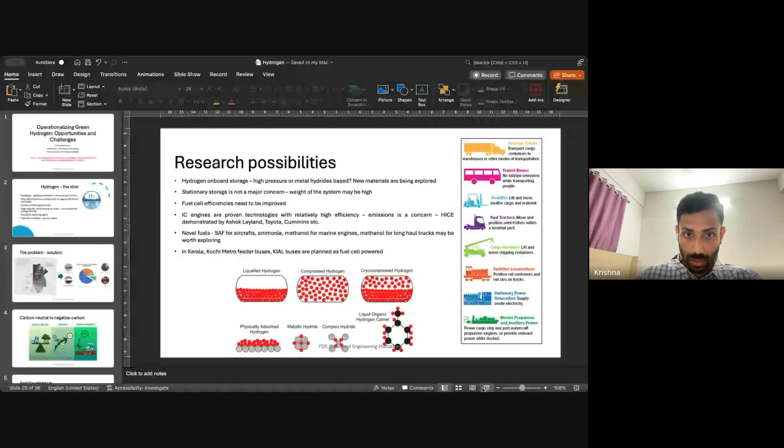Sir? Yeah, good evening. Can you see me? Yes, sir. I hope you can hear me well as well. Let me also share my screen. Just give me a minute. Can you confirm if you can see my slides? Yes, sir. It's visible.

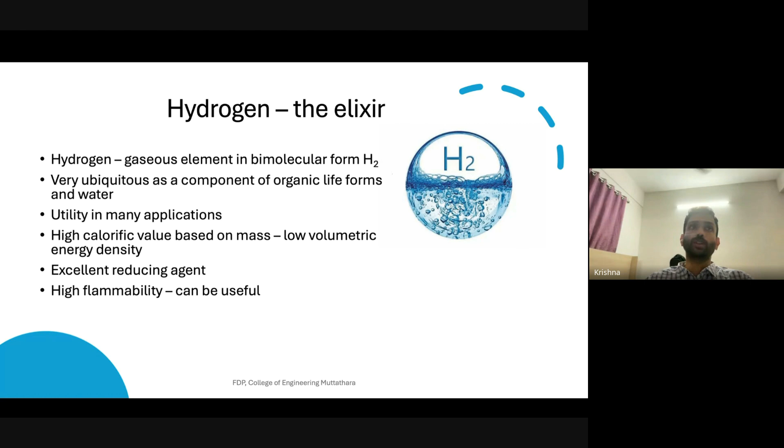But on the other hand, the flammability of hydrogen is also advantageous, because you can use it very easily as a fuel in practical devices. You do not have to worry too much about designing your combustion device. It has a very wide flammability regime, even with very little oxidizer, most commonly air. With a very small percentage of air, you can have hydrogen combusting, which is advantageous, but also disadvantageous when you look at the explosive nature of hydrogen.

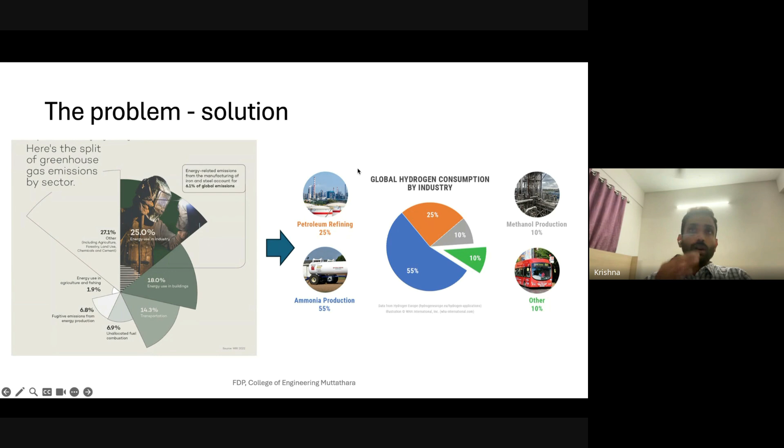So if you look at the global hydrogen consumption by industry at present, we'll see that much of it is used in petroleum refining for various processes, which is like a value addition for the petroleum industry. Then you can use it for methanol production, which contributes to 10%. You have ammonia production, which is a major contributor. Ammonia is a fertilizer, and it is also a precursor for urea production and so on.

So as you can see, majority of the hydrogen that is being produced, irrespective of what the source may be, is used in ammonia production. And then you have certain other uses like petroleum refining, which is major. And then among some 10%, transportation is also one of the uses.

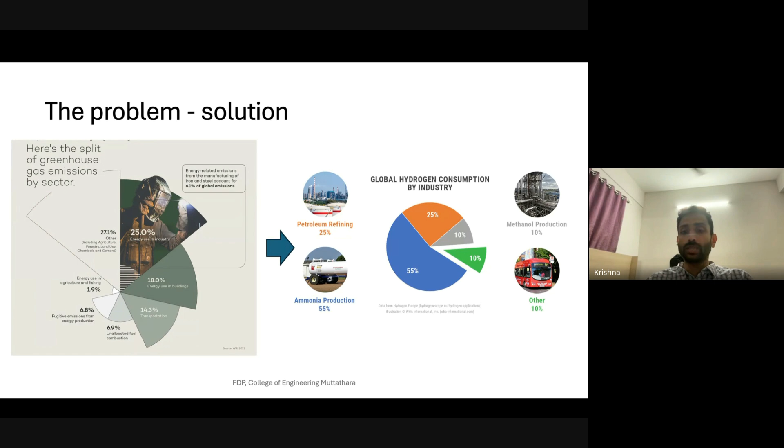Now, if you look at this total 100%, that is still not even 1 to 2% of the energy needs that are satisfied through hydrogen across the globe. Which means there is still a significant proportion of solar energy, wind energy, but hydrogen as a fuel or as a solution for energy production is not a viable option yet. So why are we looking at this?

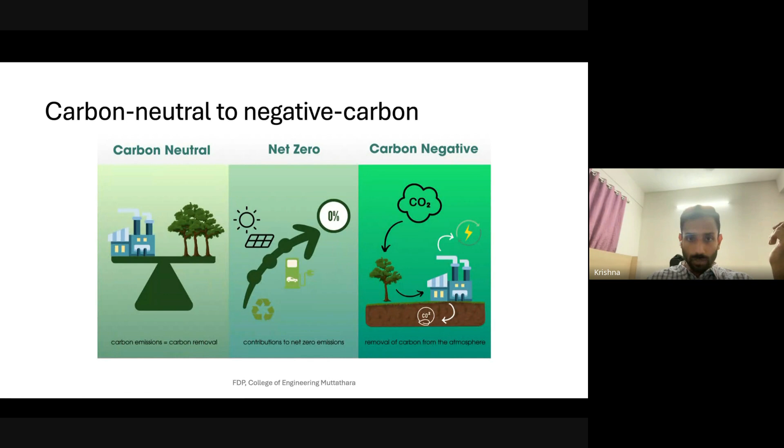Carbon negative is where you remove more carbon from the atmosphere than what you emit through your industries or through power production technologies. We want to move towards net zero initially and then to carbon negative so that global warming can be reduced. So for that, hydrogen is the way to go in a major way.

And as you can see, even wind energy is sort of rooting for hydrogen in this fight between hydrogen and carbon dioxide. So carbon-based or fossil-based fuels are a major problem because they contribute to greenhouse gas emissions, and hydrogen or hydrogen carriers do not contain carbon, and that is a viable option as far as the reduction in greenhouse gas emissions is concerned.

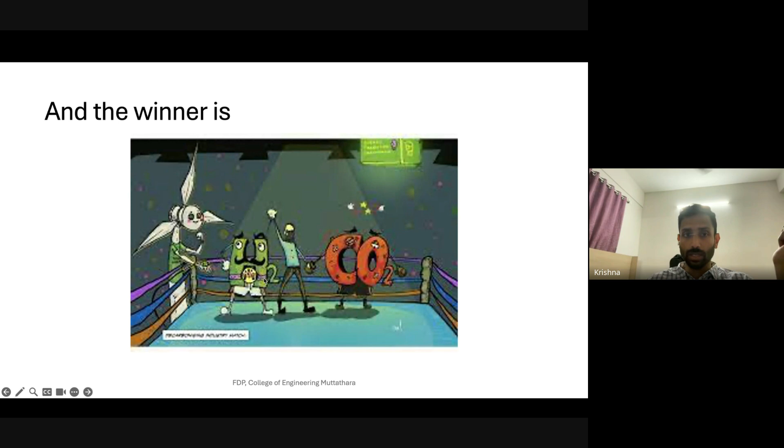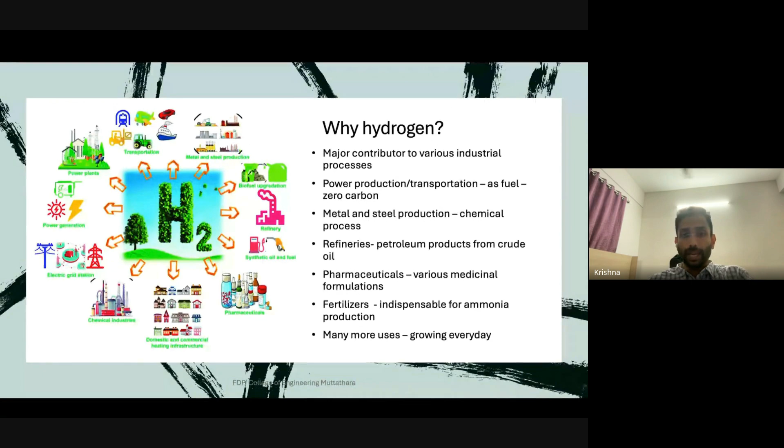Pharmaceuticals is a major application of hydrogen as a source. Various synthetic oils and fuels can be produced from it. Sustainable aviation fuel can be produced from hydrogen, and it already finds a lot of use in refineries. So hydrogen's uses are growing, which means that if you want to replace conventional sources like fossil fuels in any of these applications, you will need to produce hydrogen at a much higher rate.

So if you look at green hydrogen, it essentially means hydrogen which is not polluting, that is hydrogen obtained from the electrolysis of water. This electrolysis obviously requires some energy input. You supply some electric power to split the water molecule into hydrogen and oxygen. During this process, if the electric power input is obtained from renewable sources, then the hydrogen is termed as green hydrogen.

On the other hand, if the energy for electrolysis is not obtained from renewable sources, let's say it is obtained from nuclear sources, then it is called pink hydrogen, and there are other categorizations also.

The most common way of producing hydrogen at present is from natural gas through steam reformation, if that includes some carbon capture and storage. As you know, natural gas is nothing but methane, which contains 1 atom of carbon and 4 atoms of hydrogen. So if you're producing hydrogen from methane using

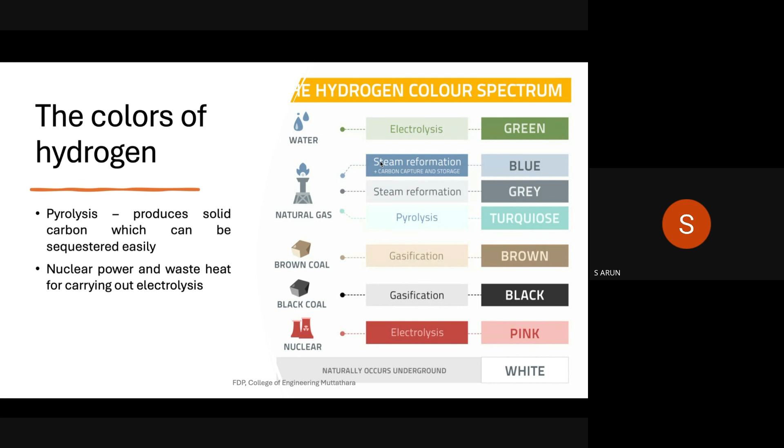Hello? Yeah, was there a question? Sorry. Yes, Suraj sir, can you please mute your mic? Sorry, sir. Yeah, no problem.

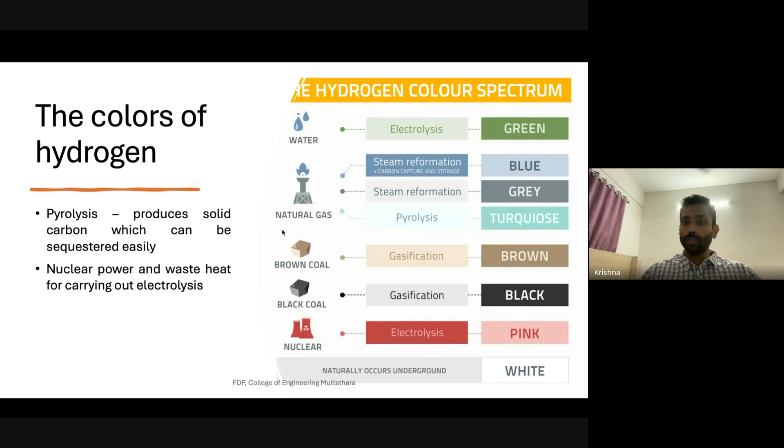So the biomass gasification that produces hydrogen has been termed or categorized as green hydrogen, because biomass, obtained from organic life forms, mainly from agricultural waste and from various trees and plants, can be termed renewable. If more trees are planted, as many as the carbon dioxide released into the atmosphere, then it is in effect a carbon neutral technology, and so it can be considered green.

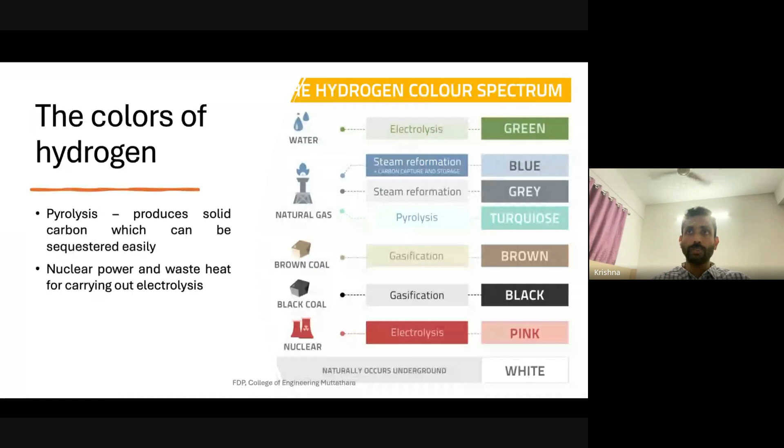That is the National Green Hydrogen Mission policy that has been implemented at the moment. So it is important to look at the Indian perspective also on this. If you are working on, let's say, biomass gasification, you are contributing to the green hydrogen mission in a major manner. So let's look at how hydrogen is produced.

Where does the hydrogen that we use currently in our various technologies come from? The most common technique is steam methane reforming. Where the methane comes from, again, is a question. That methane could be from natural gas fields underground, a major fossil fuel, or it could be from other sources such as biogas, which is produced from biomass, which are agricultural waste, or human and animal waste, and so on.

So as you can see, if you produce hydrogen using various primary energy inputs such as electrical energy, it is called electrolysis.

If you input some thermal energy, there are various thermochemical processes that you can use. Many of these also utilize some catalysts.

There is photonic energy, which is essentially what are called photoelectrolysis. You have PV electrolysis, meaning the photovoltaic cell provides the energy for the electrolysis. And then there is the other one, photoelectrochemical, meaning the energy for the splitting itself is obtained from the light available from the sun, and an additional catalyst catalyzes the reaction.

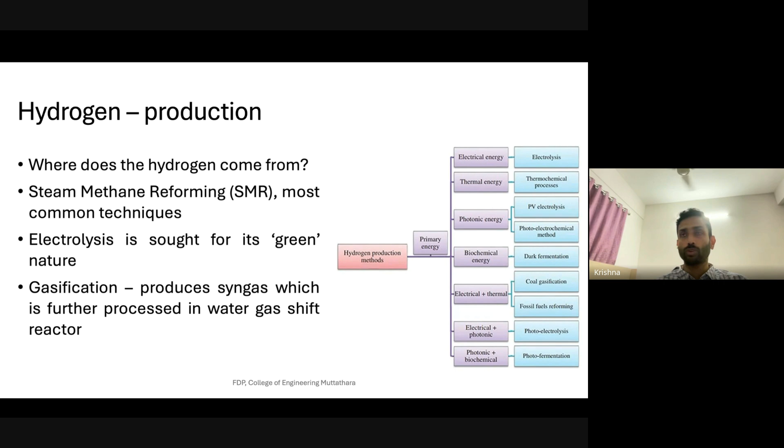And then gasification, this produces syngas, which is further processed in a water gas shift reactor for producing more hydrogen.

So if you look at the cost of production of hydrogen, if you think about the traditional method, steam methane reforming, from natural gas, which is methane, reforming it using steam and catalyst costs close to 0.5 to 1 dollar per kilogram. By today's rates, that would be about 45 to 85 rupees per kilogram.

If you add carbon capture, utilization and sequestration techniques, this will go up in cost, because these technologies also require energy input, meaning you will have to provide more input energy than the amount of hydrogen you are producing. So the cost goes up, to about 1 to 2 dollars per kilogram.

And from electrolysis using renewable energy sources, this is extremely high, right now around 3 to 8 dollars per kilogram. Again, it depends on what the primary energy source is that you utilize.

So some other numbers in perspective: if you want to produce 1 ton of hydrogen, you require 9,000 liters of water for the electrolysis, about 50 megawatt hours for proton exchange membrane electrolyzers and alkaline electrolyzers. And if you want to carry out desalination of water and then use that water for electrolysis, an additional 9 megawatt hours of power is required. So the total requirement would be about 59 megawatt hours of electric power.

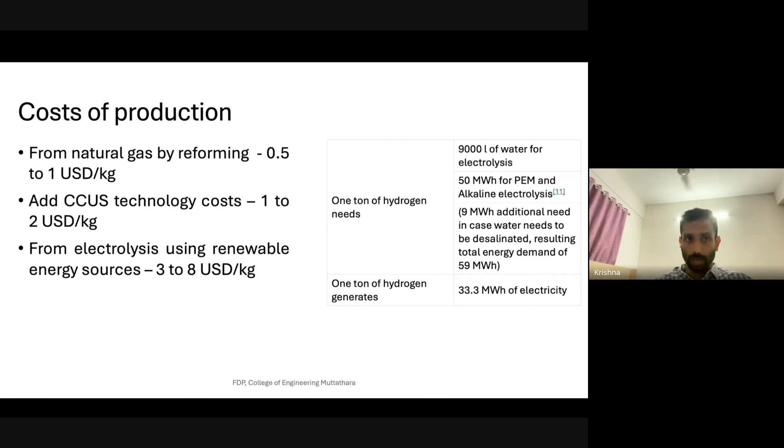That is very important. So if you look at the electrolysis of water, this is a very promising method of hydrogen production. Anyone who says that they are working on green hydrogen is probably exploring electrolysis of water as the solution. It is green if the electric power is from renewable sources. This can be used outside of the grid, meaning that you do not have to depend on the grid for the electric power required to split water.

There are three very common electrolyzers available. One is the proton exchange membrane electrolyzer, where there is a voltage applied across the electrolyzer. There are electrodes, and you have hydrogen ions crossing the polymer membrane. This forms hydrogen at the cathode. The most common catalyst used is some platinum based catalyst - these are usually noble metal based catalysts. The electron obviously flows in the external circuit, which is how you supply the electric current or apply the voltage. This is as far as PEM electrolyzers are concerned.

Then you have solid oxide electrolyzers. They use ceramic solid oxide as the electrolyte, and operate at slightly elevated temperatures of about 700 to 800 degrees Celsius. Here, the oxygen ions cross through the electrolyte and move to the anode to form oxygen, while hydrogen is formed at the cathode, and steam is reduced at the cathode. High temperatures are involved, as I already mentioned.

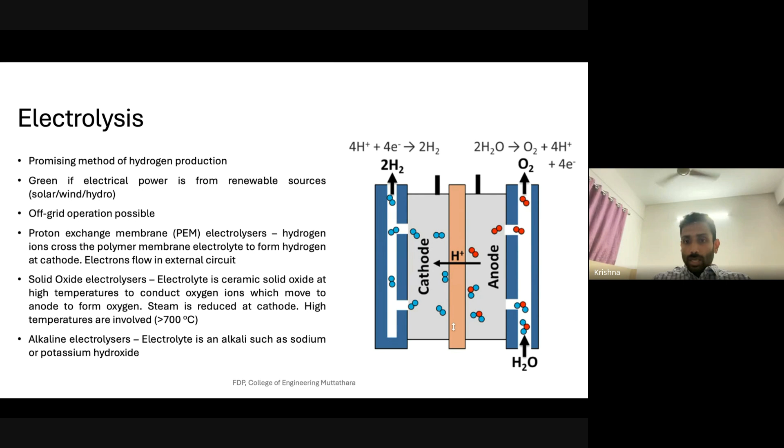Alkaline electrolyzers are another category where the electrolyte is not a solid oxide or a polymer membrane. Here it is an alkali such as sodium or potassium hydroxide. So the schematic shown here is of a PEM electrolyzer.

The other technique that I discussed is steam methane reforming. A hydrocarbon based fuel, most commonly natural gas, is used. You can actually use other heavier hydrocarbons also, but the amount of hydrogen you will get per mole or per kilogram of the fuel would be lower, because methane has the highest hydrogen to carbon ratio of all hydrocarbons - it has 4 hydrogen atoms for every carbon atom.

For instance, even if you take the higher alkane, which is ethane, you have C2H6, so the hydrogen to carbon ratio there is 3 to 1. So it is methane which is most advantageous, because it can produce maximum hydrogen for every mole of natural gas. Some high temperatures are involved, about 800 to 1000 degrees Celsius, and high pressures in the presence of steam and a catalyst.

If you do not use a catalyst, these temperatures will be much higher. So you initially produce hydrogen, carbon monoxide, CO2, some residual methane, and water is also produced. Essentially, the reforming process is a partial oxidation based process, which preferentially oxidizes carbon in methane as opposed to hydrogen.

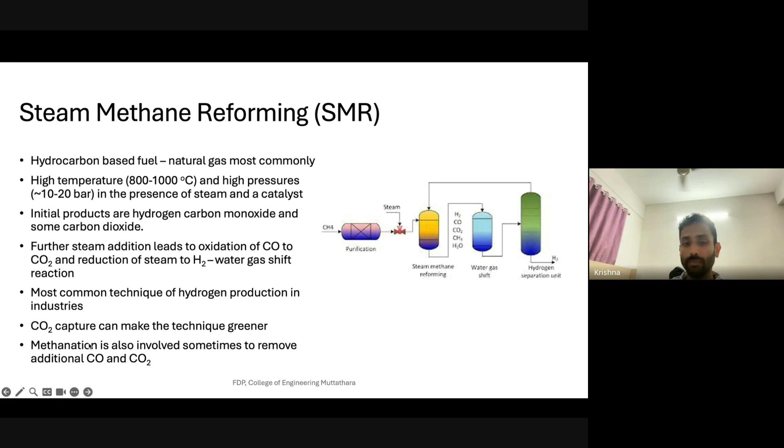So it is a win-win situation. So methanation is also sometimes involved to remove the additional CO and CO2. This means that essentially the CO and CO2 can be converted to methane also. Sometimes we use some methanation processes also. It will require some catalyst to be used.

So the other technique is, as I already discussed, biomass-based hydrogen production. This can be termed as green primarily because you are using sources that are basically agricultural based, or you are planting trees for the purpose of producing hydrogen from biomass. Okay. So there are various techniques. There is the thermochemical technique, which is most common. You have a gasifier, which doesn't use any catalyst, and it can produce CO and H2, and you can do further steam reforming, partial oxidation, and other reforming processes to produce more hydrogen and CO2.

There is also the pyrolysis process, which is very important. It can be used with carbon capture and sequestration techniques. But this requires catalysts. Otherwise, the temperatures and pressures involved are relatively higher. Then there is microbial electrolysis. This is not a very major process, but it is still being used. Then there are the biological processes. There are anaerobic processes which produce biogas, majorly methane and carbon dioxide, which can be further sent to a water gas shift reactor to produce hydrogen and carbon dioxide, or to steam reforming and so on.

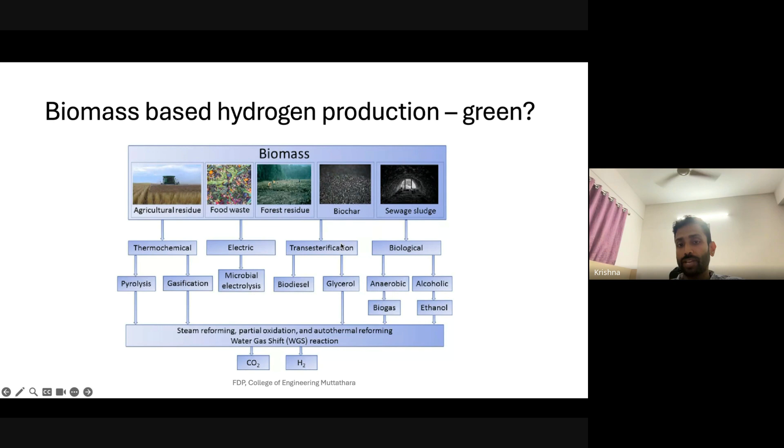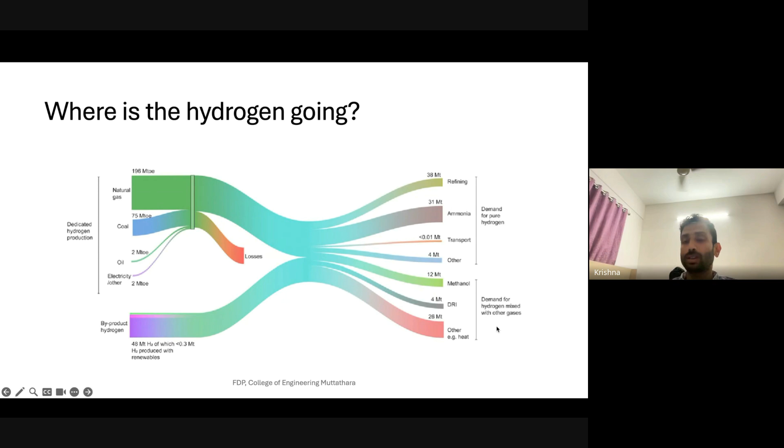And if all of these are looked at as to where they are going, you will see that a significant amount of it is being lost. It is not utilized, and a lot of it is going for refining or ammonia production or transport or methanol. DRI is direct reduction of iron. I'll talk about it a little later. And then there are also heating and furnace applications, where the end use is direct heat production and so on. So for refining, ammonia, transport and other applications, you require pure hydrogen. And for some other applications, hydrogen mixed with other gases is fine. So it is not really a major concern if the hydrogen is slightly impure.

So one of the major utilities of hydrogen is for producing grid power. It takes us towards renewable energy power production. What do you say? Primarily because during the day, as I mentioned, you can rely on solar PV based power production techniques, and you can directly supply it through the grid. Although that is not being done. Solar PV based power is still being used only for captive energy production. It is usually not incorporated into the grid. Okay? It can be used to support the grid, but it is not used to run the grid itself, because there are significant losses, and it can never really operate a complete grid on its own, because the energy requirement is extremely huge.

On the other hand, for supporting the grid, you can also use hydrogen. This requires energy and fuel storage infrastructure, because you are producing hydrogen during the day, storing it, and utilizing it at a time when, let's say, solar power or wind energy or hydroelectric power is not available.

Large capacity installations are now being planned using pure hydrogen. One such pilot plant is the 400 megawatt capacity natural gas co-firing hydrogen plant that is established in Takasago Hydrogen Park in Japan. This utilizes up to 50% co-firing with hydrogen. So 50% is natural gas and 50% is hydrogen, and the capacity is about 400 megawatt.

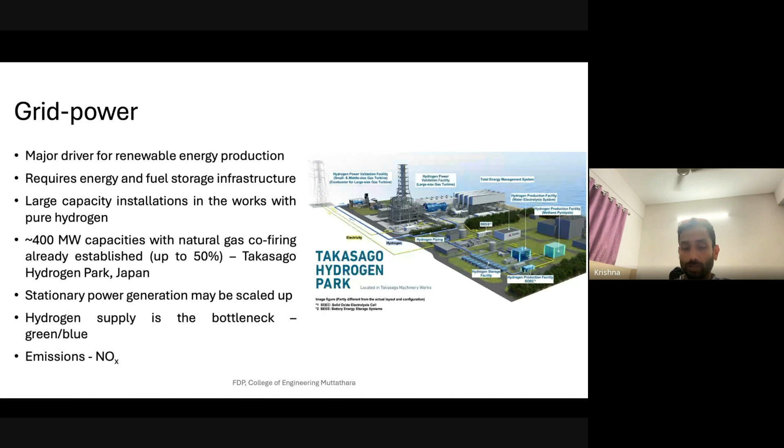oxides of nitrogen, which are a significant cause of environmental pollution. These are not greenhouse gases, but these can cause a lot of damage to the environment through acid rains and so on. So gas turbines can be operated with hydrogen. We are now starting to look at fuel flexible gas turbines, using hydrogen and hydrogen carriers.

Ammonia is one such fuel. At room temperature and pressure, it is a gas, but at slightly higher pressures, it can be stored as a liquid at room temperature, which is an advantage, because this takes away the problem of storage of hydrogen as a fuel. Now, ammonia, which is a hydrogen carrier, is a very stable compound, although it is very toxic, and it can also cause significant health issues.

I'm sorry, am I still connected? Yes, sir. Yes. Correct. Right.

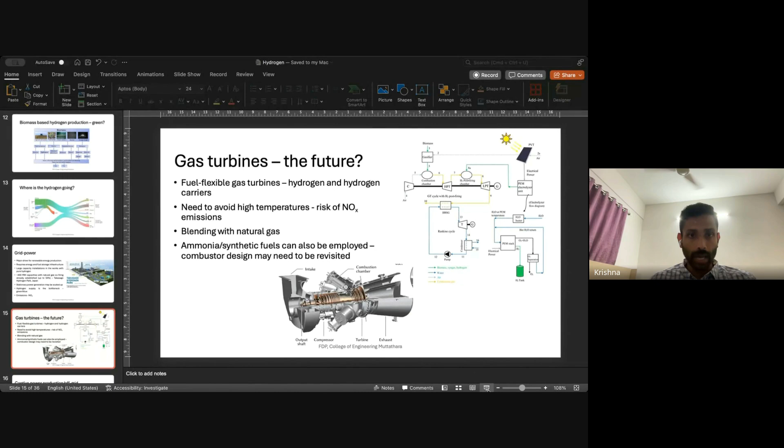Right now, we are blending hydrogen with natural gas and using it. There is the issue of high NOx emissions if you use it in conventional gas turbine engines. So it is important to mitigate such effects. And there are other synthetic fuels that carry hydrogen but do not carry carbon. Because the combustion of any carbon based fuel will produce carbon dioxide, which is not desirable. And of course, NOx is also not desirable because there are very stringent norms as far as NOx emissions are concerned.

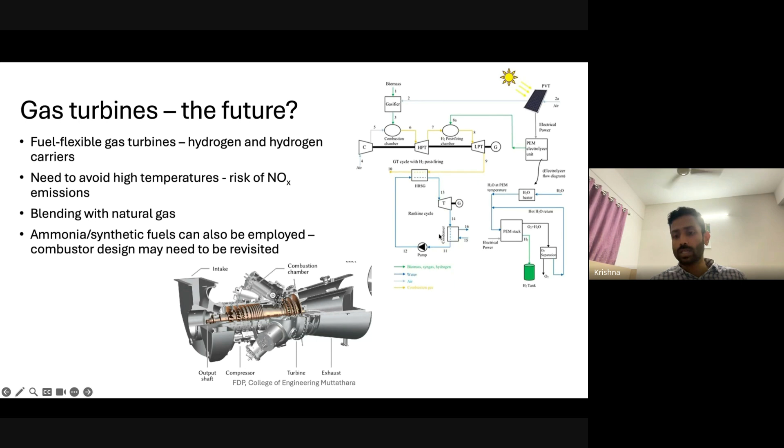So this schematic shows a gas turbine engine which uses a blend of natural gas and hydrogen, and this shows a kind of integrated system where solar PV panels are used, electric power is produced, you have an electrolyzer unit that produces hydrogen, and the hydrogen can be used in a combustor, and you can run a low pressure turbine or a high pressure turbine. Some of the energy input is used to run a gasifier, where biomass is reformed to produce carbon monoxide and hydrogen, and that is used in a combustion chamber to run the turbine. So such technologies are being looked at.

If you look at the solution for grid power, I talked about gas turbine engines which co-fire both natural gas and hydrogen. But if you look at off-grid power production, the solution is to use a fuel cell. Fuel cells are very small energy producing devices which can be used for smaller power applications. These are not meant for supporting the grid, but much more for, let's say, powering a single house, or it could be for mobility applications.

It can be used for powering a small car, or nowadays demonstration or pilot projects are being carried out on mobility of trucks also using hydrogen fuel cells. So it can be for domestic or industrial power requirements, but at a smaller scale. Fuel cell stacks are used.

So using renewable energy sources, you operate an electrolyzer which splits water to hydrogen and oxygen. The hydrogen is stored, and then it is used for producing power during off-grid operation in the fuel cell, and this is sent to the storage, and as and when the energy is required, it is supplied. And then there is also the backup generator which is incorporated into this system.

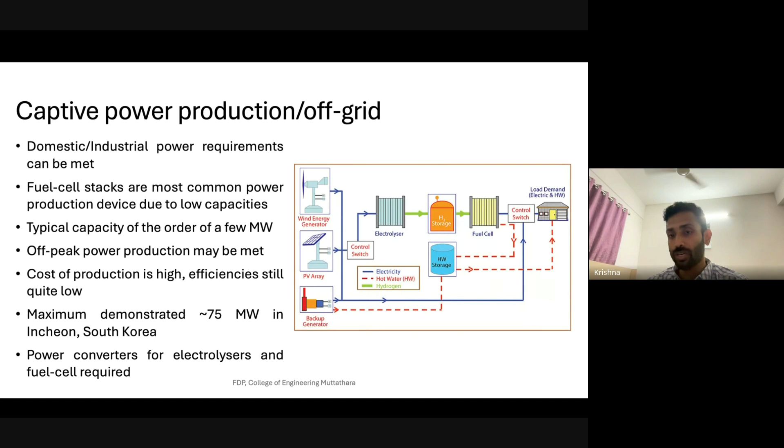Power converters for electrolyzers and fuel cells are required because they need to be modular, and they will have to incorporate the variation in the input power, because wind energy is unpredictable. PV arrays also do not produce stable power. Even during the day, it can peak at noon and then again taper off during the evening and in the morning. So those kinds of variations will have to be accounted for using some power converters, so that it's a stable supply also.

So fuel cell is essentially an electrochemical cell which uses hydrogen as a fuel with the oxidizer as air, and you produce electron flow in the external circuit, which is the electric power which can be used to operate various electrical equipment. So there are applications in automotive transport as well, but it is also seen as a major source for domestic and industrial requirements, primarily because hydrogen cannot be stored easily for mobility applications. So if you want mobility applications, you will have to have large tanks for hydrogen storage, which is much more easier for stationary power generation rather than for automotive applications.

The maximum efficiencies of typical fuel cells is around 60 to 70%. There are three kinds again, like electrolyzers: the proton exchange membrane, alkaline and solid oxide fuel cells. Remember that a fuel cell is quite literally the reverse of an electrolyzer, but of course the efficiencies are not the same when you operate it as an electrolyzer and as a fuel cell.

There are a couple of other types of fuel cells, namely the molten carbonate and phosphoric acid fuel cells, and ammonia and methanol are also candidates that can be used as fuels instead of hydrogen, which makes it very promising, because then you don't need to worry about storing hydrogen. Ammonia and methanol are much more easily stored.

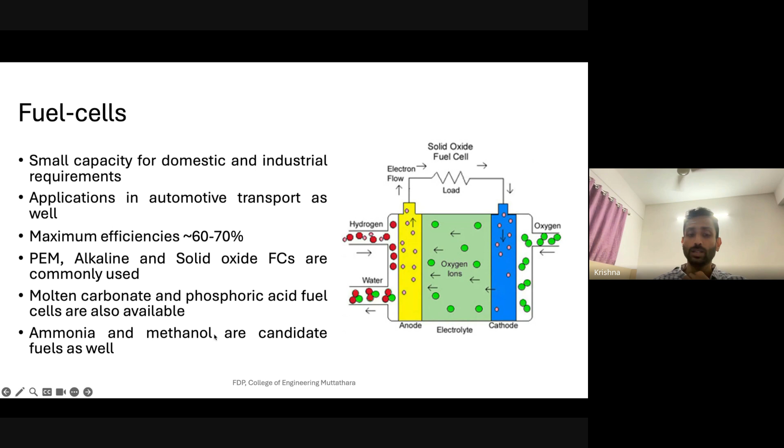So there is significant research potential as far as fuel cells are concerned, because the catalytic material used for coating the electrodes is an active area of research. You can look at reducing the precious metal loading. You can try and have extended surfaces on the electrodes for maximum durability and increasing the activity of the catalyst. There are studies on various electrolytes of alkaline fuel cells, because they do not use precious metal catalysts on their electrodes. For solid oxide fuel cells, there is still very active work on what kind of electrolytes can be used, which are effective at lower temperatures.

Also, we want to look at low fuel purity based operation. Right now, PEM fuel cells cannot tolerate any contamination in the hydrogen that is supplied, but solid oxide fuel cells can tolerate even up to 10 to 20% of, let's say, carbon based compounds like carbon dioxide or carbon monoxide.

So stack performance is also very important. The kind of performance you will get from a single cell of a fuel cell, or for that matter an electrolyzer, is not the same as what you would obtain from a stack. And there is also a lot of work that is being carried out on the thermal management of cells and stacks, because they can get heated up quite frequently, and that leads to degradation of the material and also reduction in the performance.

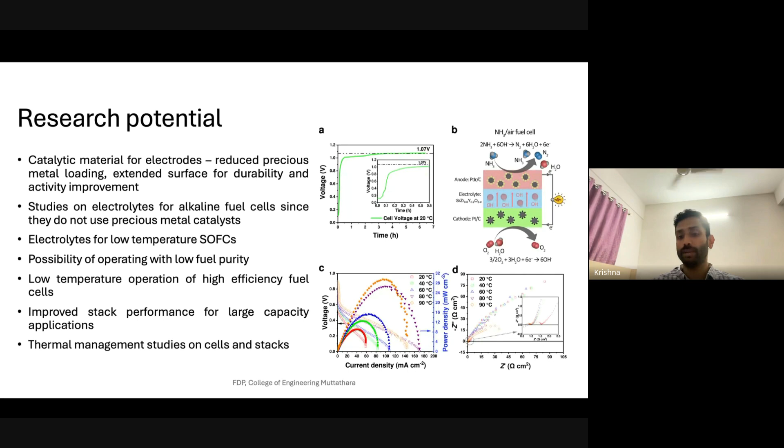So for transportation applications of hydrogen, there are various applications that can be seen. One is for surface transportation, namely trains or cars and trucks that are operated. Then there is marine and air. Fuel cells will be prime movers for surface transportation, road and rail applications, because they require much lesser power outputs. But currently we are using IC engines as the major source, because it is proven technology.

So there are hydrogen IC engines that have been developed by Ashok Leyland. Toyota has some technology. Cummins has technology for hydrogen to be used as a fuel in IC engines. But fuel cells are catching up. The advantage of using a fuel cell as opposed to IC engine is that the NOx emissions can be avoided in a fuel cell. But you could think of it as a low-hanging fruit to use IC engines. Still, fuel cells reach a point where their efficiency is significantly higher. Because if you want to immediately incorporate hydrogen majorly in mobility applications, then hydrogen IC engines is the way to go, because fuel cells are still not a very advanced technology.

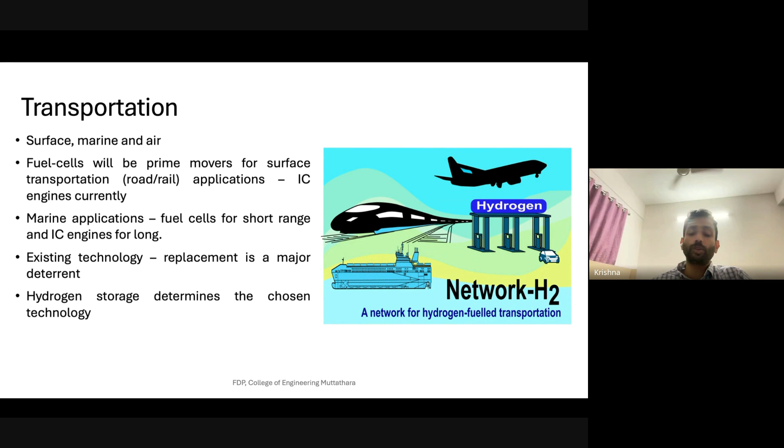Then the replacement of existing technology is a major deterrent. People are a little rigid to move to the new technology of fuel cells. And storage is also a major concern for transportation applications, because you will need very high pressures, and even then you will be able to store only very low amounts of hydrogen.

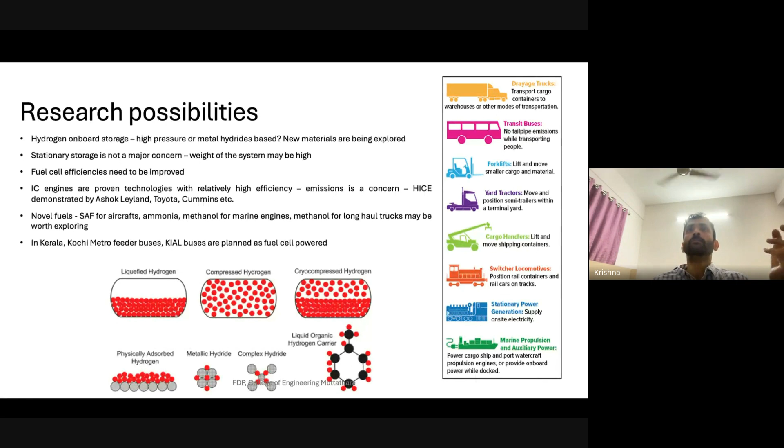So here there are various possibilities. There is the onboard hydrogen storage that is to be seen. Stationary storage is usually not a concern because you can have large capacities on terrestrial applications, but not for mobility. Fuel cell efficiencies need to be improved. Again, there the catalyst material and various other alternate catalysts are also being looked at.

IC engines are proven technologies, but we need to worry about the emissions, NOx emissions majorly. And then there are various novel fuels that are being produced from hydrogen, namely the sustainable aviation fuel that is being seen majorly for aircraft. Ammonia can be considered, methanol for marine engines, and methanol for long haul trucks has already been demonstrated.

I think Ashok Leyland has a methanol engine which they have demonstrated on some buses and trucks in Bangalore. In Kerala, Kochi Metro feeder buses and Kochi International Airport buses are planned as fuel cell powered technologies.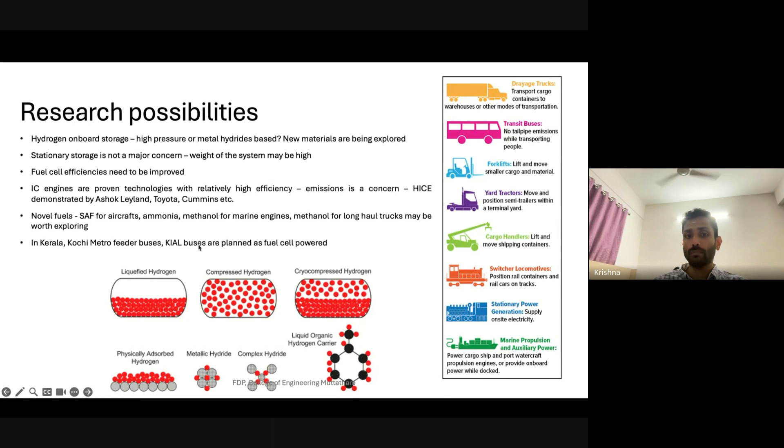Coming to refineries, hydrogen is used for hydrodesulfurization operations, whatever is obtained from the steam methane reforming inside the refinery itself. So if you go to the Kochi BPCL refinery, they produce hydrogen in a major way, but much of the hydrogen that they produce is also used in their own facilities for the processing of crude oil, because it is used in the hydrodesulfurization process.

The process is essentially sulfur removal using catalysts such as molybdenum and cobalt. And it is the most important sulfur production process. It produces about 64 million metric tons of sulfur using hydrodesulfurization in refineries.

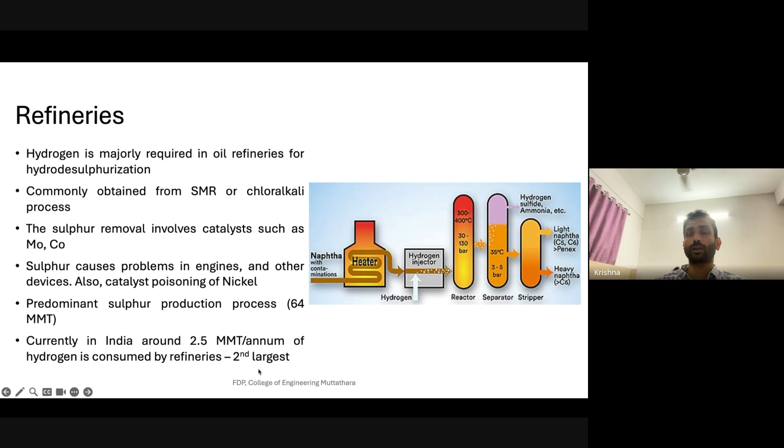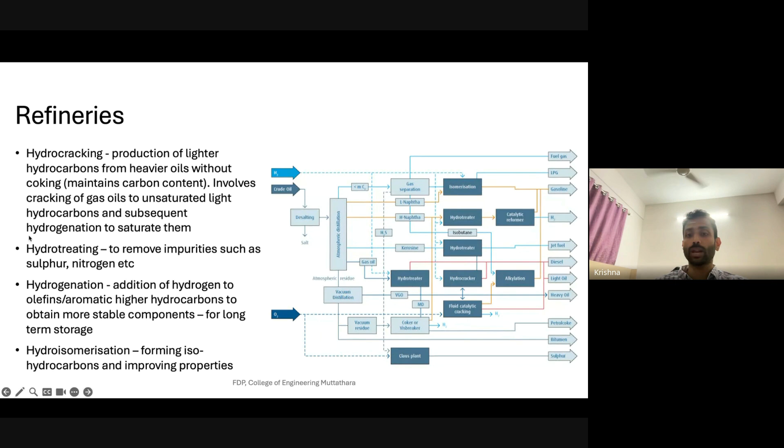As I mentioned, refineries are one of the major end users of hydrogen, whatever way it is produced, and they consume about 2.5 million metric tons per annum in India alone, and this is the second largest application for hydrogen. So these are the various other processes where hydrogen is used in a refinery: hydrocracking, hydrotreating, hydrogenation, and hydroisomerization. As the name suggests, all of these processes require hydrogen as a raw material.

The other application for hydrogen is chemical industries. You can utilize hydrogen in a significant manner there. It can be for production of ammonia. Again, I'm not talking about the fertilizer alone. This is for ammonia as a raw material for some other chemical products as well. For hydrochloric acid production hydrogen is required, methanol production, hydrogen peroxide production, and so on. And ammonia is majorly used for fertilizers and also for certain other applications.

So this schematic shows the various pathways by which different products can be produced from hydrogen. For instance, hydrogen along with nitrogen produces ammonia. The process is called the Haber-Bosch process. It's an age-old process. It's energy intensive, and it is very important in the fertilizer industry. Amines can be produced, then cycloalkanes, hydrogen peroxide, saturated compounds, derivatives of alkanes, alcohols, through various means. So this is as far as the chemical industries are concerned.

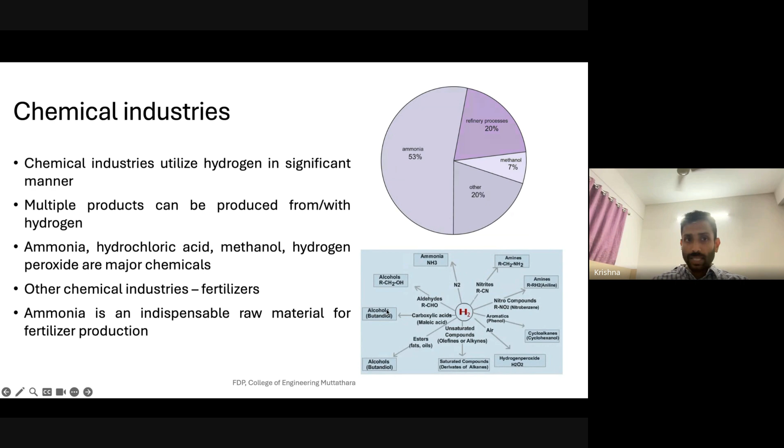Fertilizers: ammonia is produced through the Haber-Bosch process. It is used as a precursor for urea, ammonium nitrate, ammonium phosphate, and other fertilizers that are very commonly used. And this is the largest use of hydrogen; this is the first one, and the second is the refinery application.

So if you want to use hydrogen as an alternative in any other industry, you will still have to keep in mind that the requirements of the fertilizer industry, or for that matter the refining industry, cannot be overlooked. So any hydrogen that is going to be used will be in addition to the requirements of these industries, namely fertilizers and refineries.

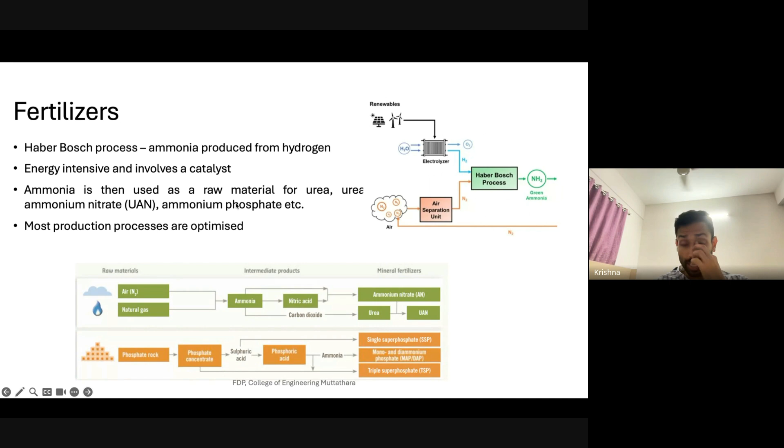So ammonia is in some sense one chemical which could potentially have many applications. It is a liquid at relatively low temperatures and low storage pressures. Marine engines can be operated with ammonia. There have been some pilot studies that have been carried out. It is a stable energy storage material as a fuel. Chemicals can be produced from it, namely fertilizers and some other chemicals also. On the other hand, it is a very poor fuel with low flammability.

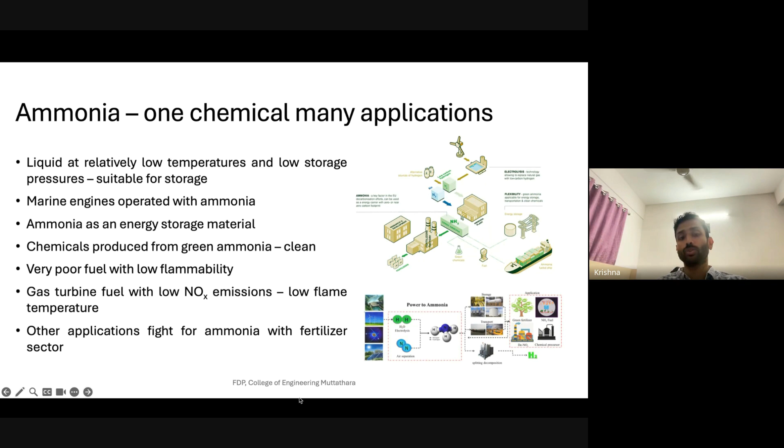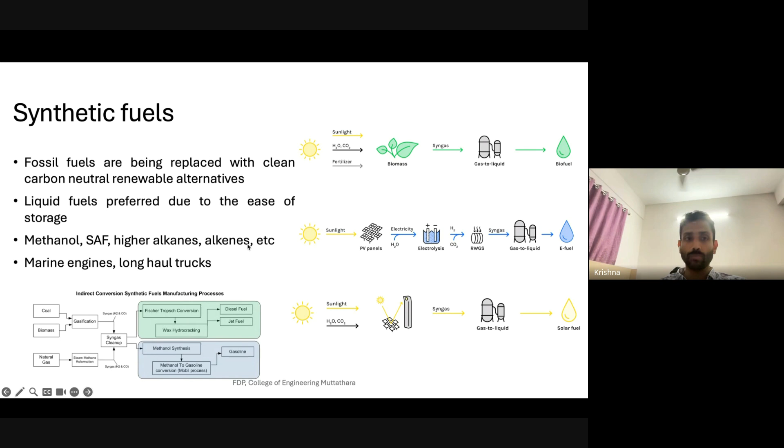We can design gas turbine engines with ammonia as a fuel, because the temperatures are relatively lower, and it can also be used in the fertilizer industry in the major part. Some other applications are production of synthetic fuels from hydrogen, namely methanol, sustainable aviation fuel, and higher alkanes, which are substitutes for petrol or diesel. Some alkenes can also be produced. These can be used in marine engines and long haul trucks.

A very small application for hydrogen is process heat for domestic applications. Let's say you want to blend it with natural gas and use it for cooking applications, or it could be for domestic heating, especially in Western countries or in very cold climates, or in industries for operating furnaces.

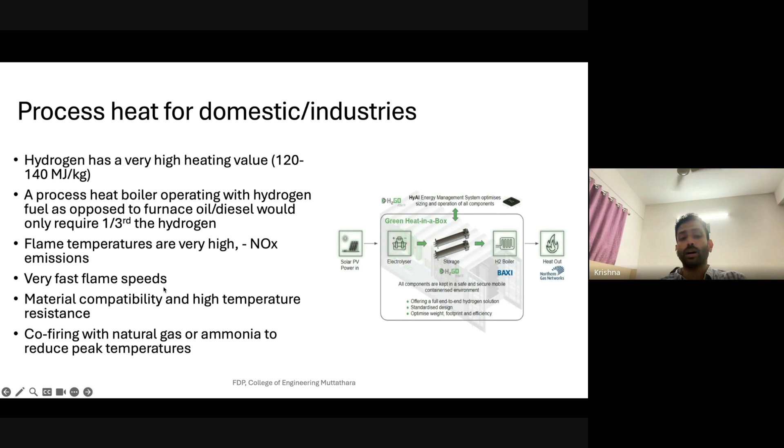Because hydrogen has a very high heating value, about 3 to 4 times that of conventional fuels, process heat boilers can be used. They will only require about 1/3 of the hydrogen as opposed to the conventional fuel. The flame temperatures are very high, so you will need to worry about NOx emissions. Co-firing with other conventional fuels is one option that can be looked at.

Coming to the steel industry, this is a very common application for fossil fuels, where hydrogen can make a mark. In the steel industry, where iron extraction from iron ore is carried out, iron ore is made into pellets, and then the fossil fuel is introduced through what are called tuyeres. This leads to a very high temperature inside the blast furnace, where additional coke is added. Coke is used as a reducing agent. There are various reactions that take place.

C plus O2 going to CO2 is the reaction that produces high energy by the combustion of pulverized coal. This CO2 reacts with carbon in the coke, producing carbon monoxide. The carbon monoxide is then used to reduce iron ore, which is majorly Fe2O3, to iron and carbon dioxide. So essentially, a lot of carbon dioxide is emitted by the combustion and also by the reduction of iron oxide. The approach involves a lot of fossil fuel in the form of pulverized coal and coke.

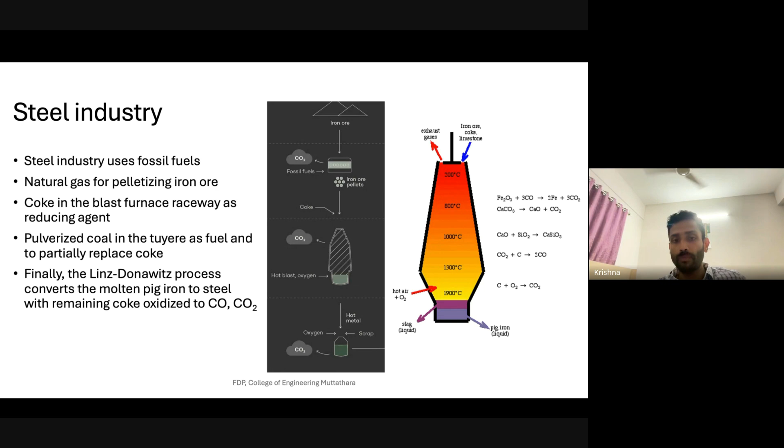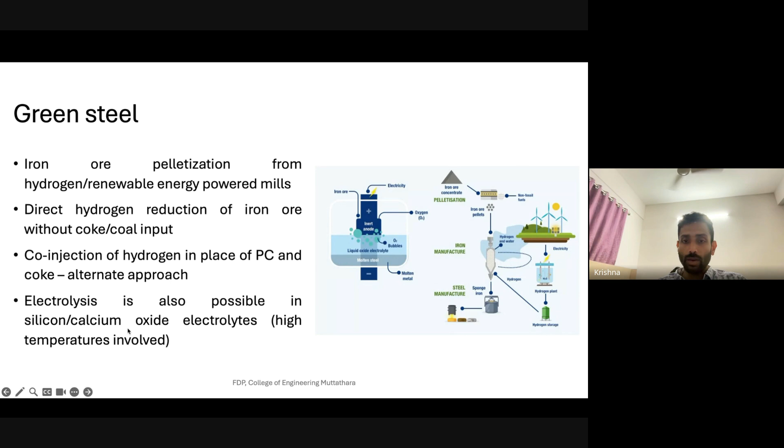The approach that could be followed is what is called green steel, where the iron ore is pelletized using hydrogen or renewable energy powered mills, and then, instead of reducing the iron ore using carbon monoxide produced from coke and pulverized coal, it can be directly reduced using hydrogen itself. Hydrogen gets oxidized and Fe2O3 is reduced. This is called direct reduction of iron using hydrogen, and it is being looked at in a major manner in the steel industry. So this has huge potential.

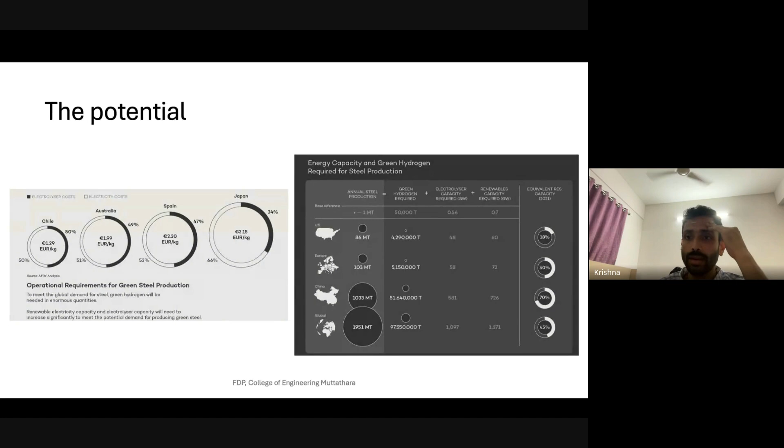As you can see, China produces about 1,032 million ton of steel annually. Globally, it is about 1,951 million ton, and China alone produces a large share of this, while other countries do not have much potential. So if the fossil fuel utilization in the production of steel can be replaced by green hydrogen, it can significantly reduce the emissions.

There are other uses. I will not go into this. It can be used in pharmaceutical industries and glass industries, in the production of float glass. It is used in the food industry for hydrogenation of oils, which is usually not a very good thing, because hydrogenated fat is essentially what is called saturated fat. It has detrimental health effects, but it also improves the storage and shelf life.

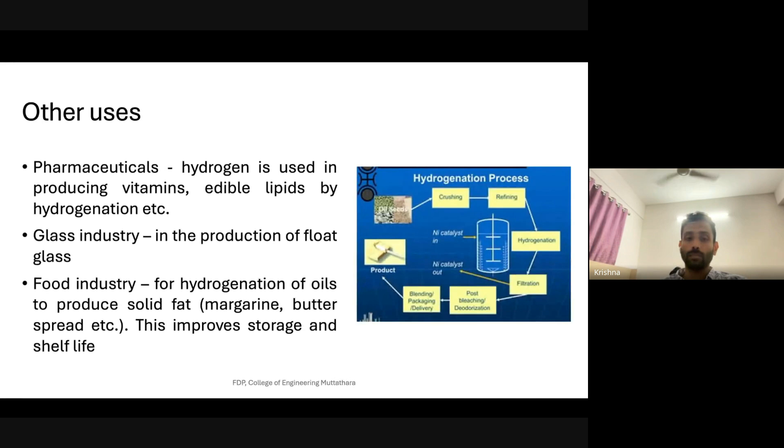So what you know as vanaspati or dalda. Dalda is of course a trade name, but vanaspati or hydrogenated fat is detrimental to health, but it can be stored for much longer. Oil or ghee will not stay for long, but hydrogenated oils can stay for much longer. That is why margarine or butter spread, which is hydrogenated, has a much longer shelf life.

So to try and conclude this, if you look at the global perspective, the hydrogen economy is booming. It is of course very important to reduce fossil fuel dependence and carbon-based emissions. In the near past, the hydrogen demand was only around 95 million ton in 2021, and it contributes to only 2.5% of the energy demand of the whole world. And this is not just for power production, but also direct utilization in, let's say, refineries or other applications.

So now there is a major increase in industrial and refinery applications, and so it is important to increase the capacities. Currently, we have not improved the green hydrogen production capacity, and it is still less than 1 million ton, as opposed to the 95 million ton that is required. Meaning that about 94 million ton or more is being produced by steam methane reforming, which is not green hydrogen as such.

So the projected capacity by 2030 is about 16 to 24 million ton through electrolysis, and 7 to 10 million ton from the SMR routes with carbon capture and sequestration techniques, meaning that these can be termed as green hydrogen pathways, and you could go up to around 35 million ton out of the 95 million ton, which of course will also go up. So if you consider that as about 100 million ton in 2030, you will be producing close to 35 million ton through green routes.

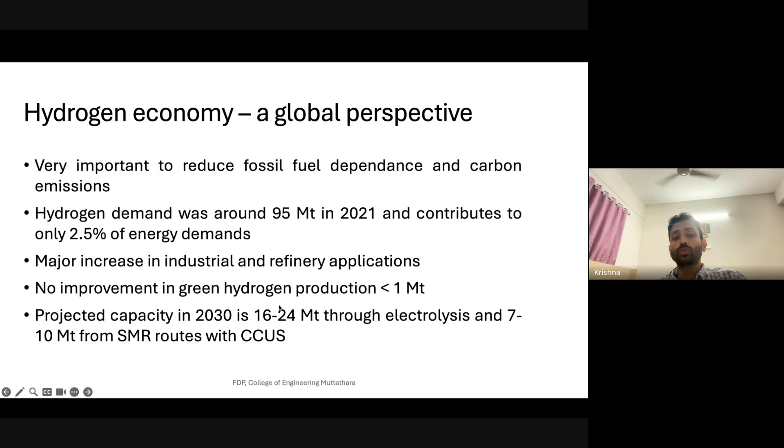What about India? So we have, by 2050, the demand for hydrogen expected to increase by 400%. We are developing green hydrogen production capacities of at least 5 million metric ton per annum, with an associated renewable energy capacity addition of about 125 gigawatt.

So essentially what we are trying to do is we are adding to the renewable energy capacity of this much, so that we can operate green hydrogen plants, mainly run through electrolysis techniques. And this would lead to about 5 million metric ton per annum of hydrogen being produced.

And for this, about 8 lakh crore is required in total investments. There is a scope for about 6 lakh jobs. The cumulative reduction in fossil fuel imports can be up to 1 lakh crore, and we can reduce the annual greenhouse gas emissions by as much as 50 million metric ton.

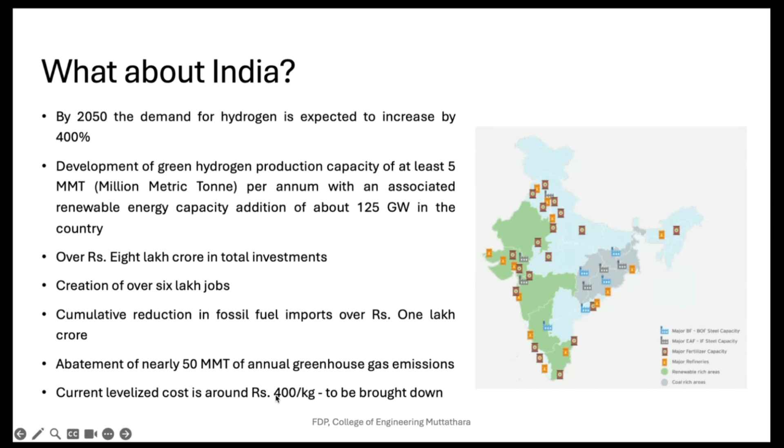Right now, although I had converted the US dollars to rupees and mentioned it, here you can see the actual levelized cost for production of 1 kilogram of hydrogen is about 400 rupees at present, and this has to be brought down.

And the challenges in the hydrogen economy are mainly infrastructure, because hydrogen distribution networks are still in development. For that, the Government of India has introduced, through the Department of Science and Technology, what are called Hydrogen Valley Innovation Clusters. One such cluster is going to be established in Kochi with ANERT as the nodal agency for the implementation. So these innovation clusters will mainly focus on the end-to-end hydrogen infrastructure or the value chain, starting from hydrogen production.

So you can produce hydrogen from renewable energy sources, and then it will be stored, it will be distributed to various end users, namely fertilizers and other mobility applications, are all going to be explored. So various industry partners are involved in this. R&D partners are also taking up projects to make this much more efficient and to add to the production capacity, and to scale it up in a major manner.

So currently production costs are very high. The extraction of hydrogen from whatever sources contain hydrogen, namely water, is still a major challenge. Transporting hydrogen is also a major issue at present.

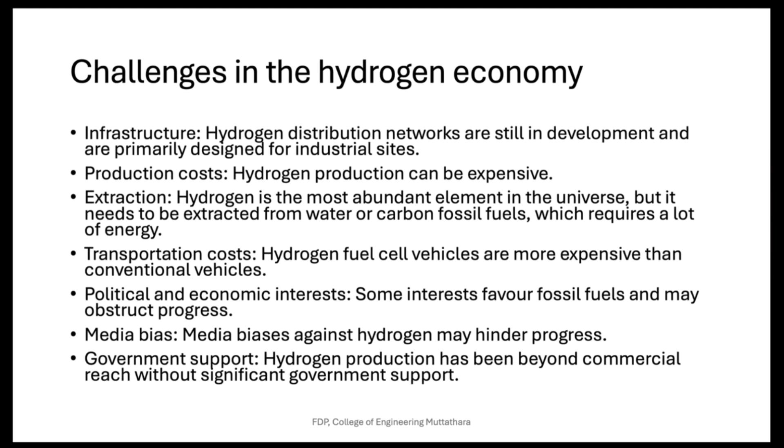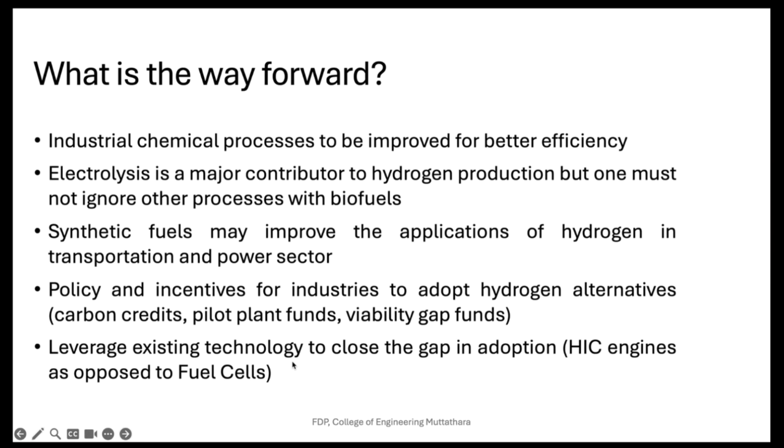Synthetic fuels can be majorly looked at, because they have applications for hydrogen in transportation and power sector. Policy and incentives from the government are also important, and it is important to leverage existing technology while also developing new technology. So I'll leave you with this question: is hydrogen the savior? Currently, it doesn't seem so.

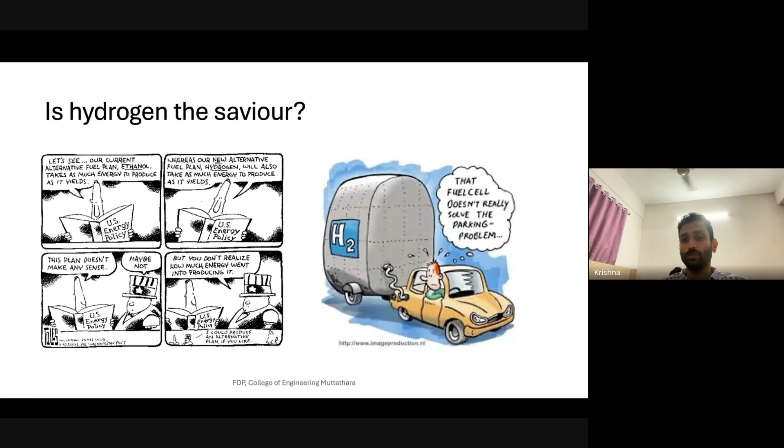It's something that we are not very sure about, primarily because the amount of energy you have to input to produce hydrogen is much higher than the energy you are going to get from hydrogen as a source of energy. But it is important from the perspective of mitigating greenhouse gas emissions, so we must continue to explore hydrogen and try to optimize technologies for hydrogen as the fuel for the future. So thank you, and I'm open to questions now.

If anyone have any questions. Good evening, sir. Sir, actually, this green hydrogen production, it is a water-intensive process, right?

So yes, it will pose a challenge on the water resources, which is still challenging the sustainability. So what about the possibility of hydrogen production from seawater?

Okay, so the existing technology cannot operate with seawater or brackish water, saline water. None of these can be directly used in conventional electrolyzers, may be PEM or solid oxide or whatever. There are certain other processes which can be used, for instance the chloralkali process. It takes water, and the current process in the industry for chloralkali is where hydrogen comes out as a byproduct. There, NaCl is added to water—essentially, salt is added to water—and you produce chlorine, and that is the name chloralkali. You produce hydrogen from that, and also sodium hydroxide.

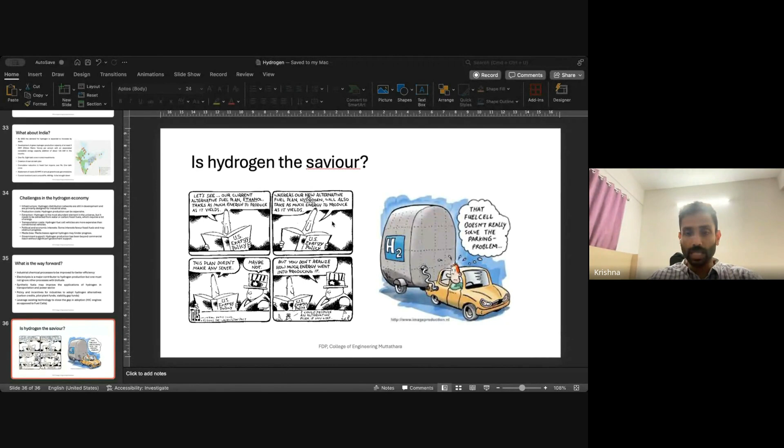Thank you, sir. It was a very informative session. You have clearly explained all the aspects of hydrogen. Thank you. Thank you.